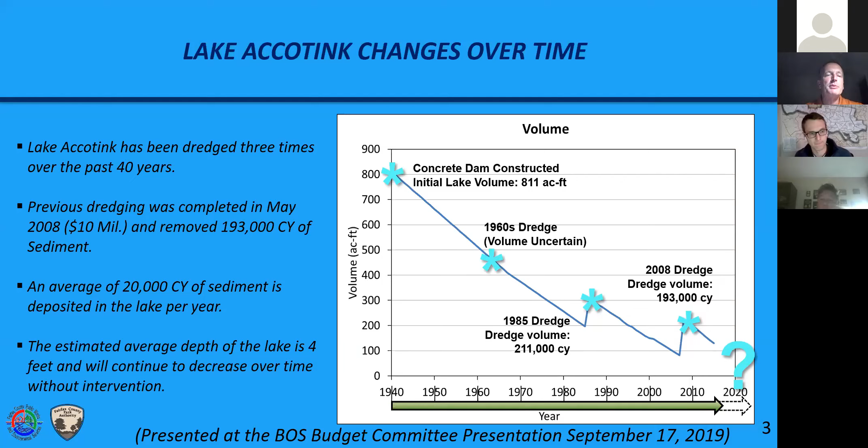And it was estimated in one of the studies several years ago that the lake average depth is about 4 feet. It's likely lower than that now, but we'll know that here pretty shortly. We'll get the results back from some of the studies that are ongoing. So the Park Authority in their master planning process initiated the discussion about management options, and there were 5 public meetings held in 2016 on. Numerous studies were conducted, and then questionnaires sent out seeking comments and input from the public. And the bottom line is that 90% of people that responded favored having the lake.

And 65 of those favored having retained the existing footprint, which means keeping the lake essentially as is. There's also, of course, Save Lake Accotink, a nonprofit formed to help get information out, and there are HOAs that contributed to that support also.

So the project that we have in front of us now: we estimated previously about 350,000 cubic yards of material need to be removed to restore an average lake depth of 8 feet. We looked at options of where we could potentially pump sediments to. That was part of the study process during the master planning phase. And it was determined that we really didn't have any options outside of the public lands, and that the most appropriate place where we could get the room to do it and have the access is up in the Wakefield Park area, so north of Braddock Road.

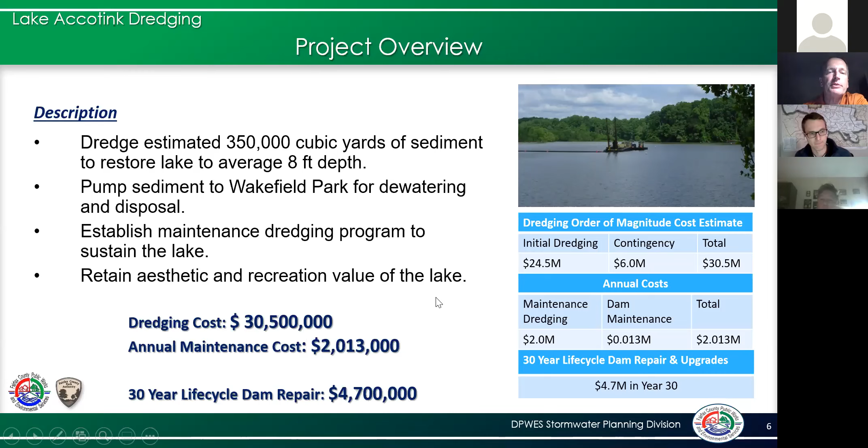So the team we've assembled to run this project includes staff from the Department of Public Works. Tonight, myself and Justin Pastori are on. We also have folks from our maintenance division, our construction management division, and our wastewater collection division. On the Park Authority side, Valerie Maslin is heading up the coordination for the project, along with Adam Wynn, who will be speaking tonight and helping run the Q&A session. Dan Grolke is the manager at Lake Accotink Park from Park Services, Chris Goldbecker from Park Services, and Amber Strammel from Park Authority Area Management 2, and she actually works out of Wakefield Park. Marcia Pape from Supervisor Walkinshaw's office is a part of our project team.

And then on Arcadis, we have a really deep team. It includes Mike Wooden, Fernando Pasquale, Doug Sawyers, Akshay Kumar, Wesley Thomas, Amanda Kohler, Shannon Dunn, Susan Larcher, and then sub-consultants, Frank Graziano with WSSI, who'll be working on survey and permitting. And also we have the company ECS, who's doing the geotechnical analysis. A number of these folks will be speaking to you shortly to talk more about the project. In addition, we've been working with key stakeholder groups, which include the Friends of Lake Accotink Park, the Friends of Accotink Creek, Save Lake Accotink, and multiple homeowners associations and civic associations.

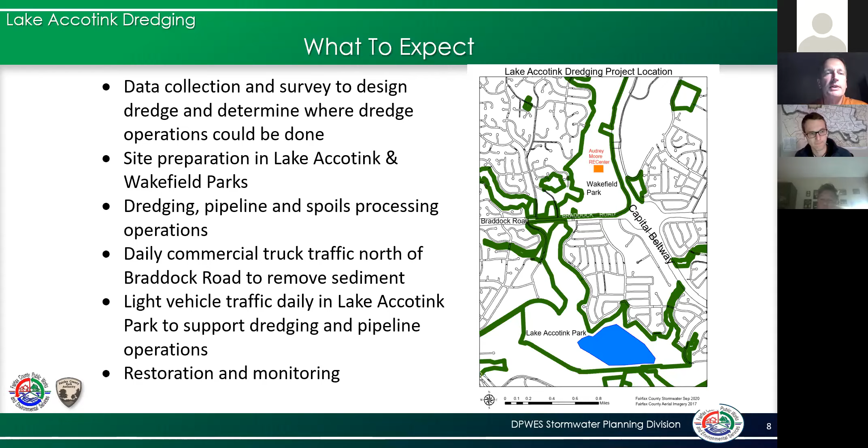So let's look at that schedule as to when you might see these activities. So right now we're in the data collection phase, and that will continue until next spring. And then in the summer, Arcadis is going to deliver an alternatives analysis, which basically is a summation of all the observations and measurements they've made within the park areas and recommendations on where we could conduct the different activities we need in order to do the project.

We will go through a process. We'll be coming back out to the public, back to you guys, in July of next year to talk about the course of action the county's prepared to take. And then by the end of that summer, we'll be going into design in 21. And so we hope to have the concept design and value engineering study conducted by April of 2022.

And for those who are not familiar with county projects, any project with a construction value over $2 million has to go through value engineering. And that process allows us to assess the project to ensure we're getting the best cost and most effective project delivery.

And then final design permitting, we anticipate by March of 23, and we should be ready to dredge when we get those permits. So we anticipate beginning to dredge no later than March of 23, completing the dredging by November of 2025, and moving directly into a post-construction monitoring period, which will take about 3 years.

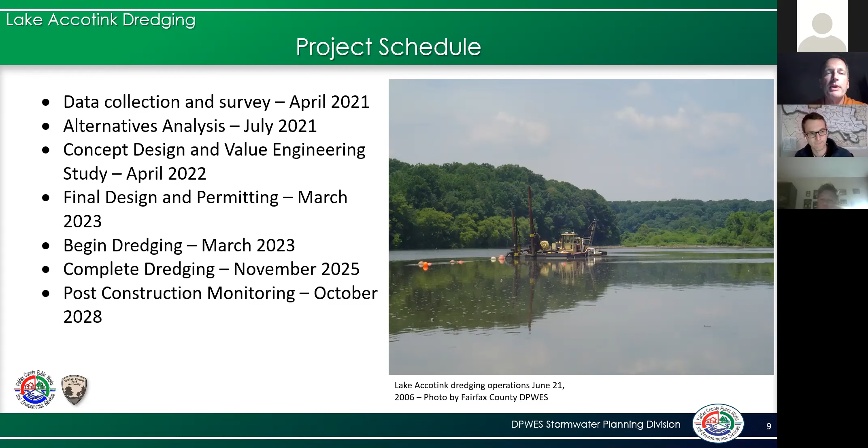So while we're doing this project, there's a lot of other work going on in the area. Right now, over on the west side of Lake Accotink Park near Rolling Road, Washington Gas is conducting some work related to their utility infrastructure. In addition, on the west side of the lake, the trail system there on the old rail bed, the Park Authority is doing work near the Danbury Forest area. VDOT has ongoing survey work along Braddock Road related to the Braddock Road improvement project.

Shortly, we're going to be beginning construction in Accotink Park near the Dominion substation for the Accotink Creek at Wakefield Park stream restoration. And this is going to be along the main stem of the creek, so you'll see construction activity in that area beginning in the next couple months.

Soon the park there will be kicking off the design for the renovation of Audrey Moore Rec Center, and that project should go into construction during the time that we're going to be starting the dredging operation. So there'll also be the renovation going on at that time. And then right now we have kicked off the field work with Arcadis and their subconsultants to do the assessment.

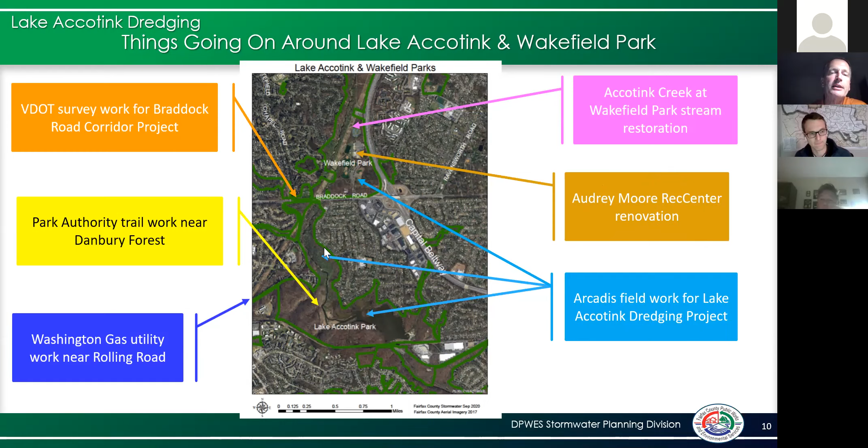Sorry. With that, I'm going to stop sharing my screen. I'm going to turn it over to Mike Wooden, who will talk a bit more about this project.

And I am going to just double check with everybody. I'm hearing that I was muted. I apologize for that. My screen was not telling me that. Just check in real quick with Mike. Are you on? I'm here. Can you hear me? Great. Did I convey enough information there, Mike? Because it looks like I was muted at some point. I'm not sure when I let off. No, I think you're okay. You dropped off right as you started the transition, so I think you got through the slide content that you intended to. All right, great. Well, I will drop off here and let you take over. Thank you. All right, very good.

Thanks, Charles. And while Akshay is bringing up our presentation, I'll give a quick introduction. Again, my name is Mike Wooden, and I'm the project manager for the Arcadis consulting team. I'm going to be joined by several of our team members tonight. We're going to provide to you an update on the pre-design activities that are currently underway. We'll start with a description of the field investigations that Charles mentioned. Those have recently begun, and we'll also talk about how those are going to be used to collect information that will inform the evaluation of project alternatives and eventually the design.

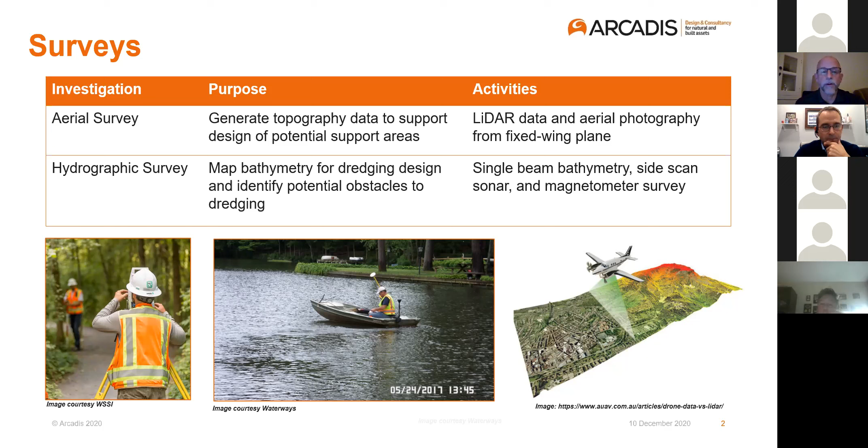All right, I'm Wes Thomas. I'm going to talk a little bit about the sediment investigation piece that's a part of the field assessment. The sediment investigation we're planning to conduct in February of next year. So we have a couple of months between now and then.

But really the primary objective of doing the sediment investigation is for us to study and understand what the physical properties of the sediment in the lake are, if there are areas within the lake where that material type changes. And that will help us understand how easy sediment in different areas will be to dredge, and then how that material will behave as it's being dredged, and also as it's being dewatered. The other thing it will help us understand is what potential beneficial reuse applications we might be able to take advantage of with the material after it's dewatered, or what disposal options we may want to consider.

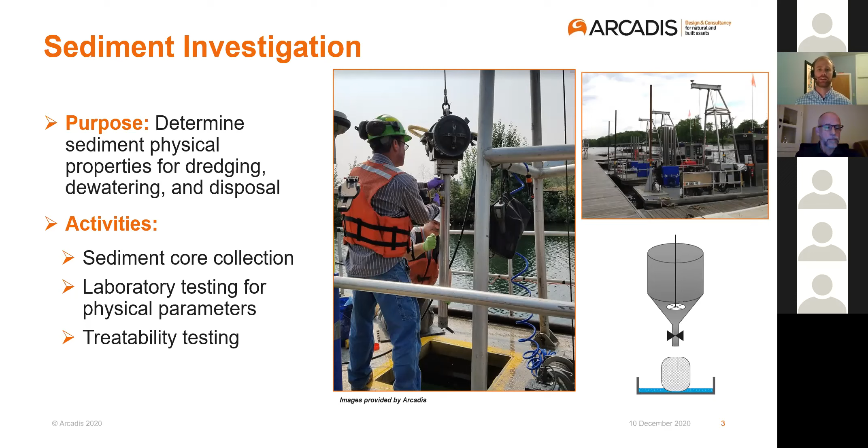And then the last thing we'll do is we'll take some fraction of the material that's collected and send it to a treatability laboratory in North Carolina, where we can simulate different dewatering operations and understand how the material will dewater, how long it might take to dewater, and other characteristics that we might want to consider during the alternatives analysis phase of the project or during the design itself.

So if you want to go to the next slide, please. Here we've got a figure that essentially shows the plan for the sediment investigation.

Some of those hydrographic survey methods that Frank mentioned in the previous 2 slides will also help us to understand if there are other obstructions or potentially unknown utilities, as unlikely as that might be. But we can use those surveys as lines of evidence to help make sure that we are putting these sample locations in the right place in the lake.

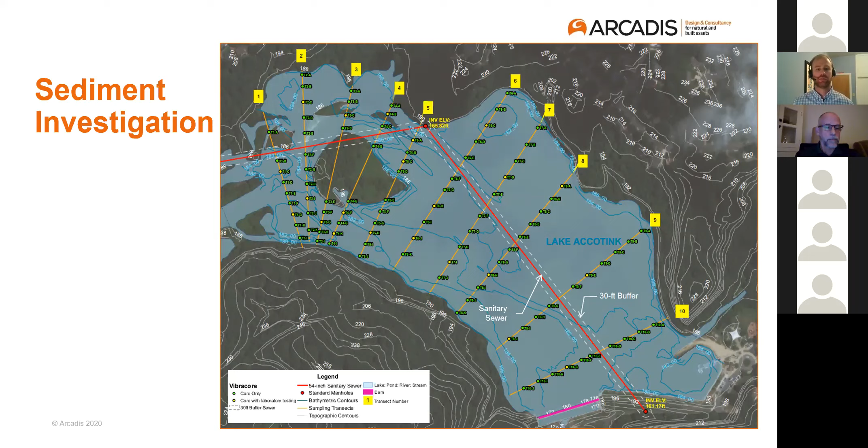Okay, now I'm going to hand it over to Akshay, who's going to talk a little bit about the geotechnical investigation.

Hoping everyone can see me and hear me. My name is Akshay Kumar. I'll be the assistant project manager for this project, as well as the pipeline design lead for this project.

One of the key investigations we're going to conduct through the field work period is understanding the geotechnical properties of the soil. Due to various work that's going to be done over the course of the dredging operation, including truck activity, location of the pumping systems, routing of the pipeline for the conveyance of the dredge material, and location of the dredge processing itself, it is important to understand the properties of the soil and the water itself. So what we're going to try to do is collect as much information as we can about the soil, which forms the basis for earthwork and other structural components that are going to be built.

So first and foremost, the activities are going to entail soil borings. We have ECS, who's our sub, that's going to be doing most of this work. They'll be coming out to site and taking soil borings at predetermined locations. That's going to help us understand and get a map of the properties of the soil in the project area.

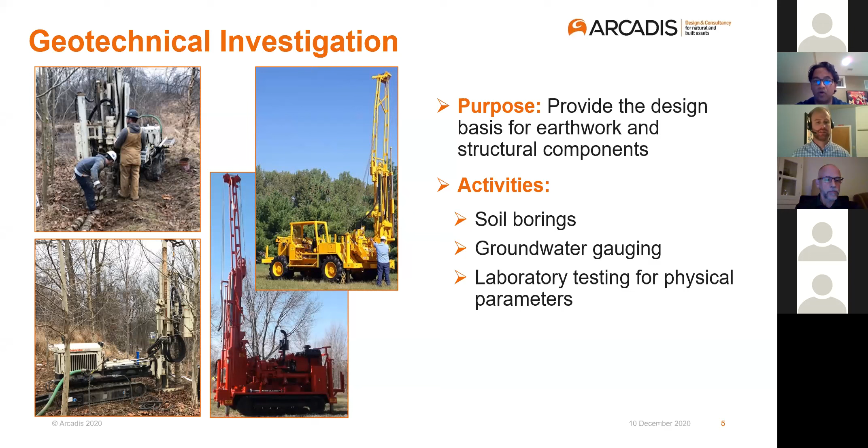With that, I'll hand it over to Frank Graziano, WSSI. Okay, thanks, Akshay. One thing I neglected to mention as far as the survey goes is that the hydrographic survey was completed over the past couple of weeks. So people may have noticed a small boat out there for a week or so. And I got to look at the magnetometer results just an hour or so before the meeting, and it's pretty fascinating. You absolutely can see that sanitary lateral. So hopefully that'll be very, very helpful.

I wanted to talk a little bit about the desktop evaluations that we're also conducting. Natural and cultural resources are going to be a very important component of this project in terms of wanting to minimize impact. So to help guide us as the project team as we move through the alternatives analysis, we're going to, for the first go around, do a desktop evaluation of the wetlands as well as the vegetative community mapping, primarily trees. And what this will be is photo interpretation of aerial imagery.

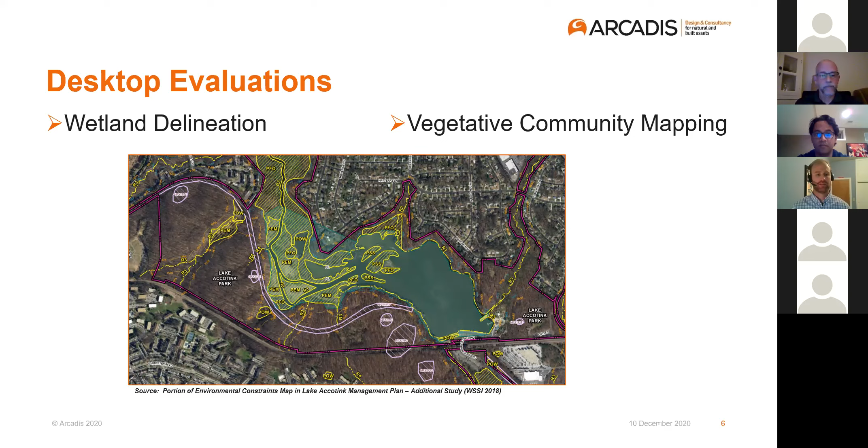Great, thanks, Frank. So we're also pleased to be able to share a summary of the selection criteria that we've begun working to develop with Charles and his team. And while we haven't yet defined the alternatives themselves, we got started by developing those selection criteria that will be used to evaluate the alternatives, looking at the categories being dredging, sediment transport, and processing. And so again, I'm going to throw it back over to Wes to start us off with a discussion of the selection criteria that will be used for the dredging evaluation. Wes?

Yeah, thanks, Mike. So in order to really evaluate the differences between different alternative approaches and ultimately select the best overall approach for the project, we have prepared a set of criteria that are specific to each design element, as Mike said. And so on this slide, we've got the selection criteria that have been prepared for the dredging design. And what you'll see on this slide and the next few slides is that we have divided the criteria into 4 categories, which include park management, community-related criteria, environment, and construction-related criteria.

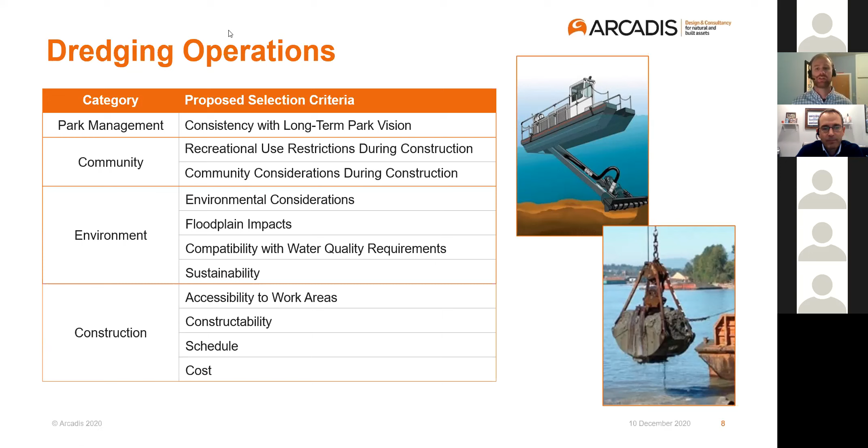Thank you, Wes. Appreciate that.

Piggybacking on what Wes said, we're going to be utilizing the same set of categories and selection criteria for all the design elements, including the dredging operations pipeline, and what Amanda will be talking on the next slide, so that we have a set of criteria that is consistent across the board for comparison of various alternatives.

Pipeline being one of the most important parts of the project, because it conveys the material that's dredged to the point where it's going to be processed and dewatered for disposal or whatever the case might be at the end. And so because the pipeline traverses such a long distance, from the lake to the point where it's going to be processed, it's going to be important to consider how the pipeline is going to be routed and where it will be routed.

And of course, it's got to be consistent with the park management in terms of its long-term vision for the park, like Wes mentioned. And where's the pipeline going to be for the maintenance dredging as well? And of course, we ought to make sure that the community continues to use the lake for recreational use and consider other community concerns and make sure that the pipeline alignment and the pumping system and the dredge processing is not in a place that's going to be hindering the recreational use of the lake.

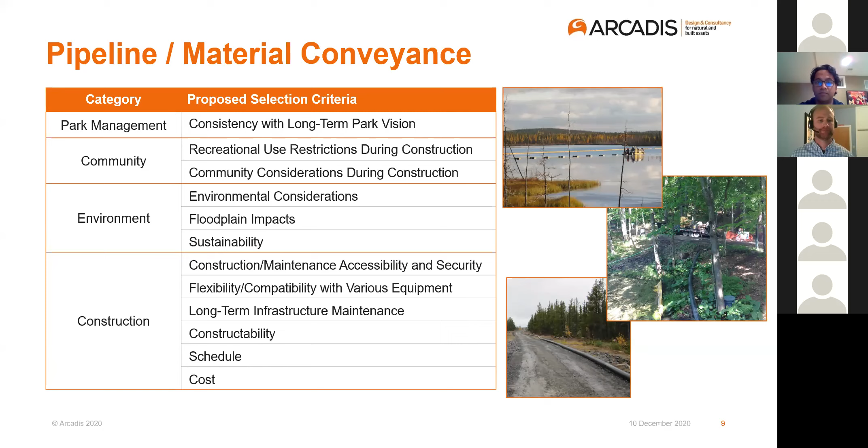With that, I'll turn it over to Amanda. Thanks, Akshay. All right.

So the goal is to try and minimize any floodplain impacts, as well as minimize any potential conflicts of flooding with the construction schedule. And it's also associated with the available area for dewatering. As we're trying to identify those areas, we're going to be considering what preparation requirements will be required to make those sites suitable for dewatering.

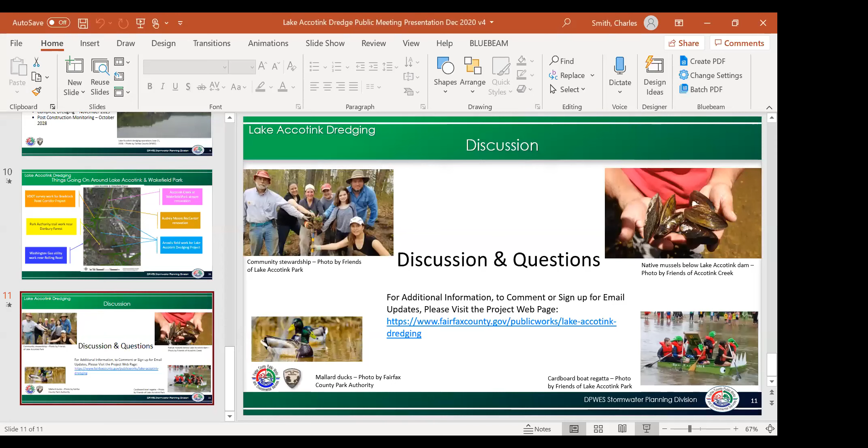Well, I think the last part of that was the potential increase in cost. It's really hard to answer that question at this point. I think that when we prepare the alternatives analysis, when we look at something like cost effectiveness, we would account for the potential influx of sediment between now and the design. And then part of that analysis is also accounting for the cost of future maintenance events. And so I think that the sedimentation rate would be related to accounting for both of those costs during the alternatives analysis phase.

One other item I'd like to throw in on top of that is cost for this project, and this is a major issue that Arcadis will be addressing, is cost estimates. But cost for dredging operations is highly variable. It's not just the volume, it's fuel costs, it's the cost of fees to dispose of the material, which has a lot to do with the composition of the material. So there's a lot of variables that will come into play as those cost estimates are updated.